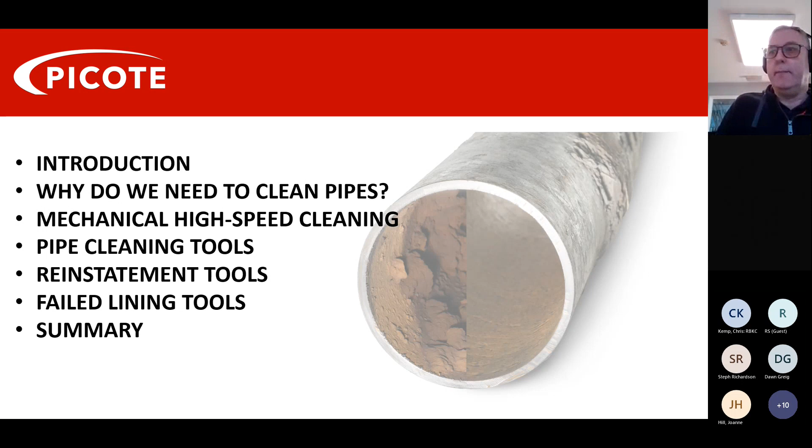20-25 minutes. So we're going to do a brief introduction of the business and the company. We're going to cover the question why. I'm going to explain the different cleaning methods, including our high-speed methods. We're going to look at the tools, and we've got various videos to show you as well, built into the slide pack. So, Picote Solutions.

Picote was formed back in the 1990s. It's a Finnish company, and at that stage they specialised in the rehabilitation of pipes in buildings. If you go back to those years, there was very little mechanical equipment, tools, etc. So as they developed the in-house lining systems, they had to develop a range of tools.

This carried on until 2012, where we had various competitors and companies asking about purchasing the machines and tools. So in 2012, we launched Picote Solutions. I work for Picote Solutions, and we sell the tools and equipment around the world through a range of resellers.

In 2018, we launched our e-learning Picote Institute. There's a slide at the end of this where you can get the address for that, and there's loads and loads of information on there.

In 2021, we launched our international consultancy part of the business, combining all our technical support, technical knowledge, and in-house rehabilitation experience that we've done for years in Finland. We're now showing people, teaching people, and showing it around the world. And this year, we launched what we call Picote Aqua, and we'll come on to Picote Aqua in the presentation.

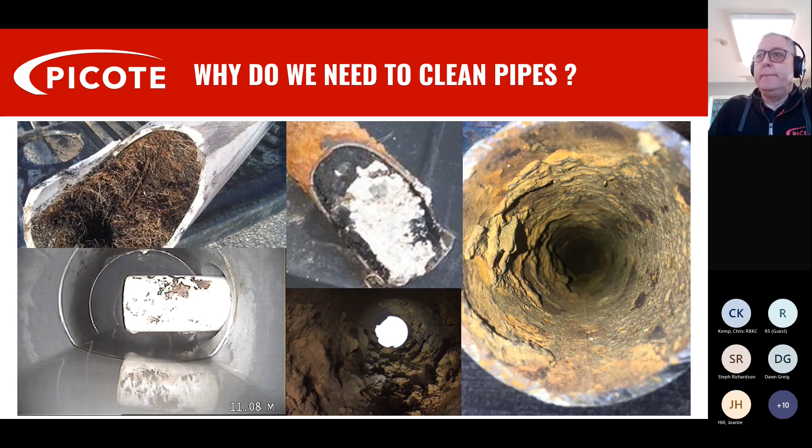The machines were initially developed by 2008. We have a range of machines, not just one machine - from the DN32 up to the DN300. So that's your 1.25 inch to 12-inch pipes.

The rotation speeds - normal traditional electromechanical machines rotate around about 200 RPM. Our machines, our slow speed is 500, and then depending on the model of the machine, they rotate up to 2,900 RPM. We have various shaft sizes - our smallest machine has an 8mm shaft, and our largest has an 18mm shaft.

That steel shaft is housed inside an outer casing. So the operator holds onto the outer casing and feeds the tool through the pipe, and the tools are connected onto the internal steel shaft. They have multi-purposes, multi-uses - they're great for cleaning, descaling, root cutting, unblocking pipes, removing fats oil and grease, cutting out failed liners, cutting out concrete, and reinstating lateral connections after a pipe's been lined.

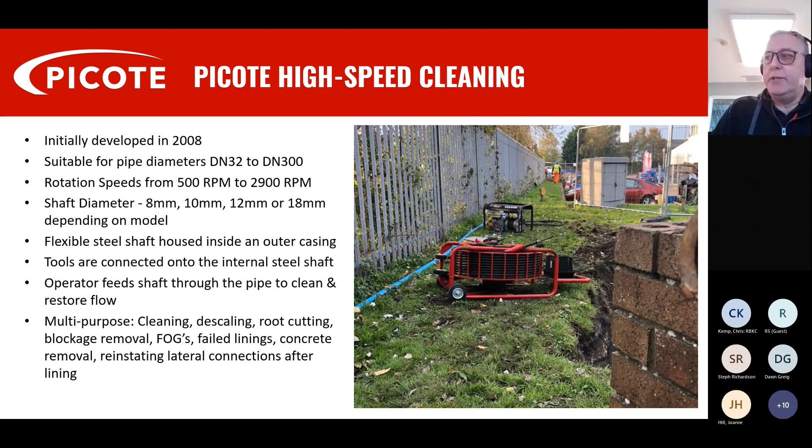The machines have a small footprint. You can see this one here - it's what we call our Super Midi, and it's being used to descale and clean a water main prior to rehabilitation. Like I said, we have a range of machines.

Benefits of what we've got here: the machines are very portable. They all have a built-in safety clutch that can either be mechanical or electronic. Very, very safe to use because there's no contact with rotating parts. The operator's just holding onto the outer casing. All our machines and tools are designed to go through 90-degree bends.

They are mechanical machines, so you don't need to use water. In some cases we might have a little bit of flow of water to take the debris or dust away, but you can use them dry. They can be used in vertical or horizontal pipes, and we have a small footprint and low carbon, which is great.

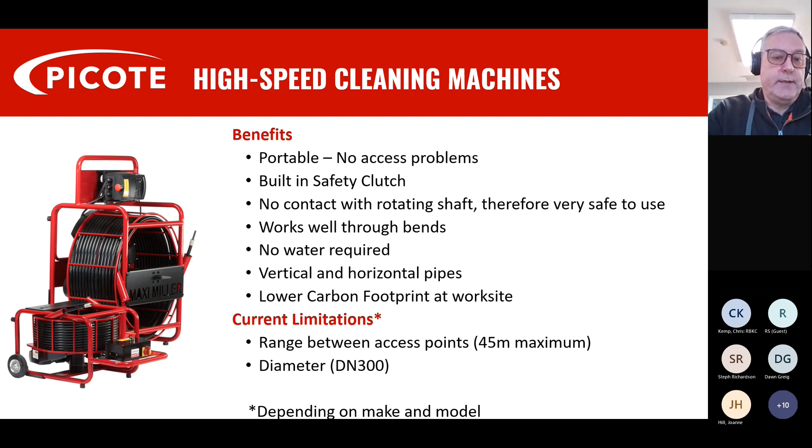Current limitations, and I'll come forward straight up with this at the beginning of the presentation, is that our limitations currently are the range. We can work from a single access point up to 45 meters, depending on the machine, and our top diameter is DN300.

So what we've got is machines. The 8mm machines, the mini cleaner, is suitable for 32 to 70mm pipework, with 16 meters working length on the drum, but we can add 10-meter extensions as well. The 8mm machines will go 32 to 70, and the mini miller will go from 50 up to 150. The 10mm machine, the midi cleaner, would do 50mm to 150.

And then we've got the super midis and the maxi on the 12mm shaft, and the big Power Plus.

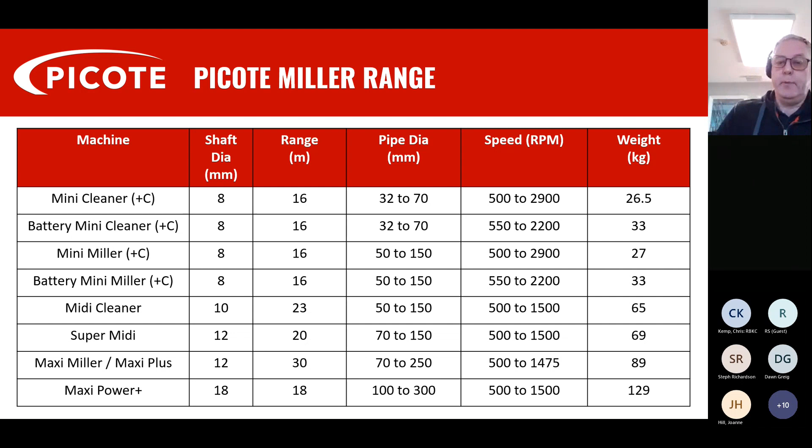When people are looking at purchasing a machine, it depends on the pipe diameter, or it depends what you want to use the machine for. So we have two tables. Here you can see that we've got the machines for cleaning, descaling, root cutting, lateral reinstatements, removing failed liners, and cutting out concrete. The numbers in the boxes relate to the largest diameter that machine can do.

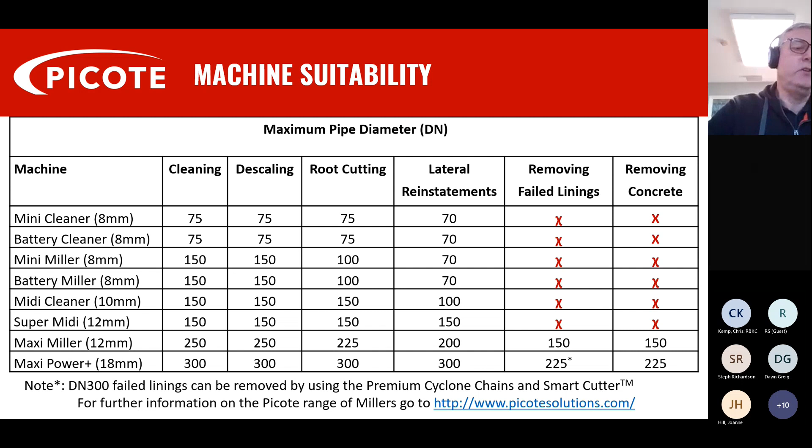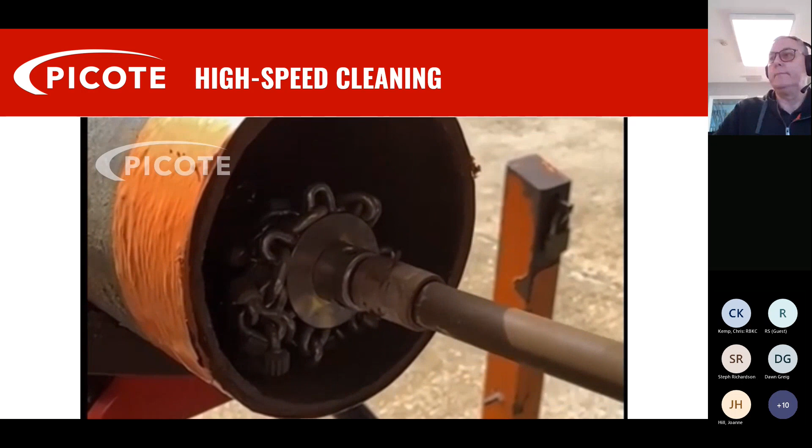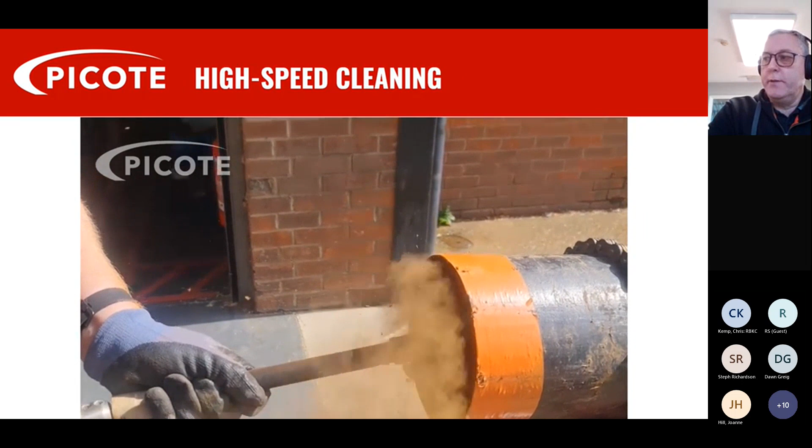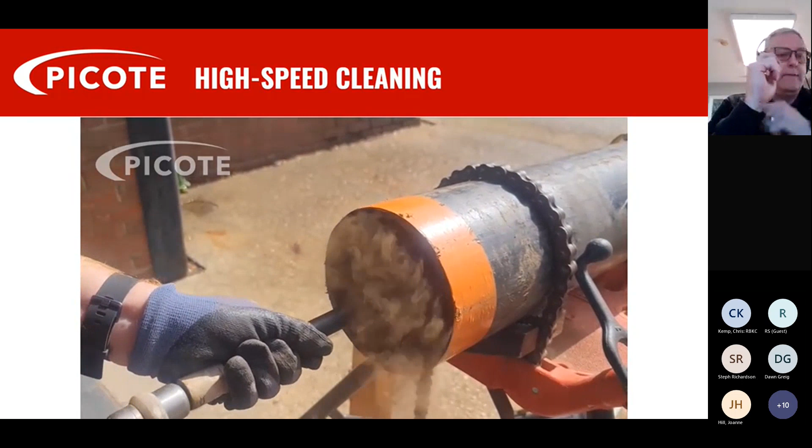As I said, when it starts up we get dust, and then we just feed the chain backwards and forwards through the pipe, and you can see here there's loads of dust and some small particles of heavier material. But the beauty about high-speed cleaning is that the chain just turns everything to dust, and it's very efficient as well.

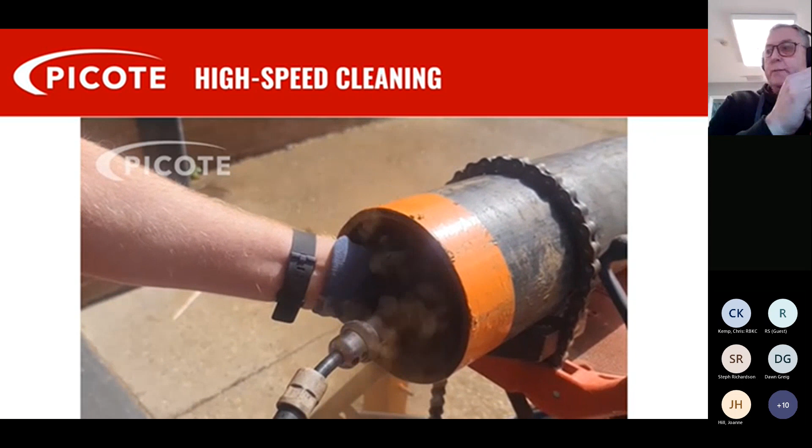So currently, existing pipe cleaning methods—there's existing technology out there, from pipe pigging, rack feed boring, drag scraping. Some of the newer systems use a combination of air and grit, where the air creates a vortex and you blow the grit through.

Clean systems: we've got ice pigging, and we've also got high pressure water jetting. These technologies are generally cumbersome, outdated, time consuming, and require large generators or compressors and winches to operate. Safety and worksite footprint are also a huge consideration, and that's one thing where, again, the high-speed machines have a very small footprint and are very safe to use.

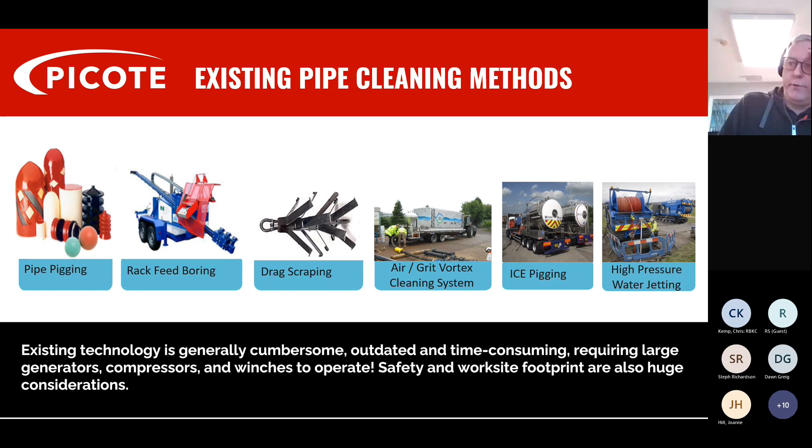So here's a pre-cleaning and post-cleaning photograph in cast iron.

The beauty about the machines is because we have the outer casing, you can actually fasten a CCTV camera behind the cleaning head and attach it to the outer casing. Then you can actually monitor what you're doing, monitoring the progress etc., which is also another big advantage.

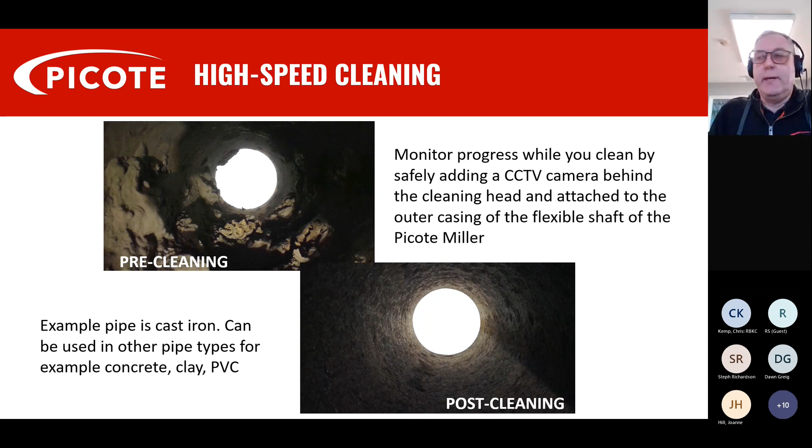We do a whole range of tools - I'm not going to go through all the tools. We have chains: what we call our PVC chains, which are safe to use in plastic pipes. We have Tiger, which have very hard wearing, long-lasting carbide teeth, and are very light chains. We have our standard, and then we have our premium chains, which are the ones we use to remove really hard substances like concrete. So those are the different types of chains that we have.

And then obviously we have what we call the original chains, which have two connection points. The operator sets them to the correct size by either stretching them or bringing the two connectors together slightly. They're adjusted manually. We also have what we call the 3D chain.

This has a spring and a forged head on it. So the faster the machine rotates, the larger that chain is.

It's great because you can do multiple changes in diameter with the same chain without having to keep manually adjusting it. We have our Tiger drill chains, which have a cutting drill head on the front. So where you've got a pipe that's 99% full of tuberculation, tree roots, or debris, the Tiger drill head cuts into it and makes space for the chains to work.

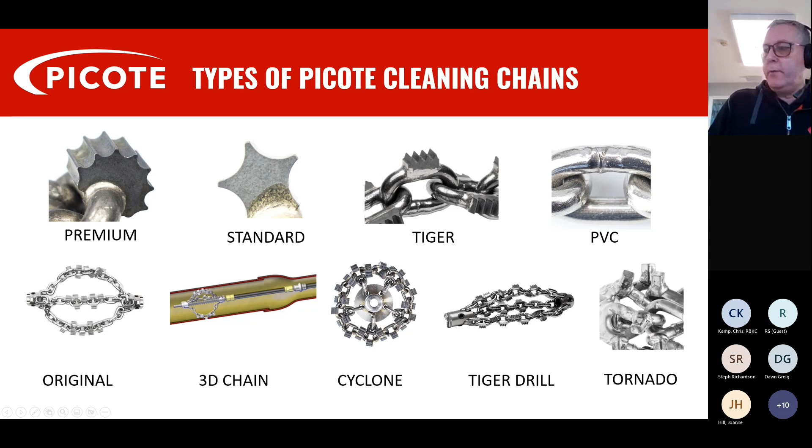And then for the really large diameters, we have what we call the tornado chains. So here's a fairly good example where we use high-speed cleaning. This is a section of pipe that was removed from a process plant. The client or contractor tried various cleaning methods, including ultra high pressure water jetting, without any success at all.

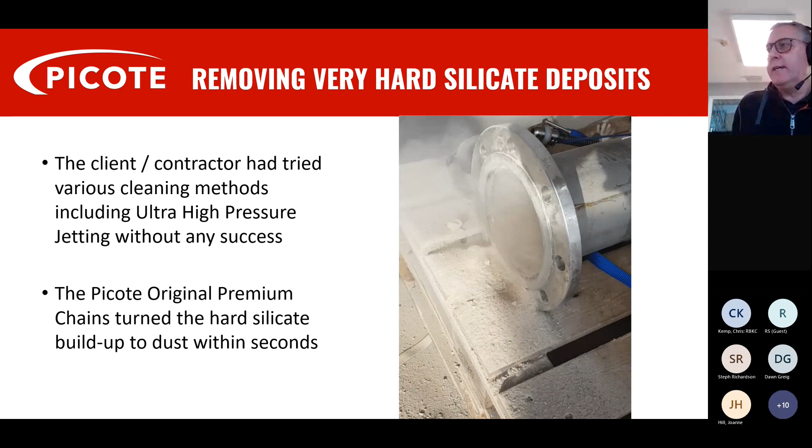They brought a section of the pipe down into Picote, and this is the video. We literally took one of our original premium chains, I think it was on a Super Midi - that's a 12mm machine. You can see here when the chain starts rotating, the material just turns to dust.

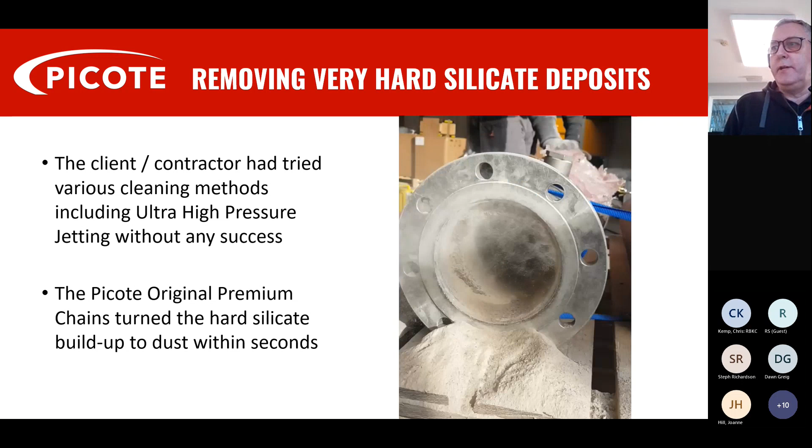And with the ultra high pressure, the jetters didn't even scratch the surface. So a good example of what you can do with high speed cleaning.

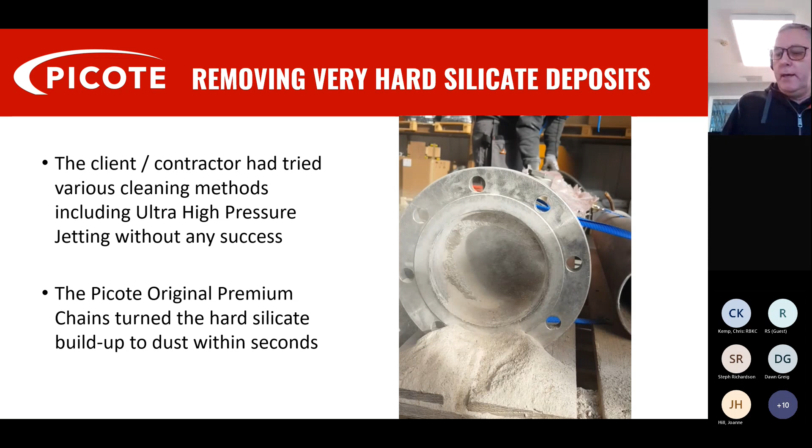There we have what people refer to as the Picote Smart Cutter. This is an award-winning tool that won an International Society of Trenchless Technology award back in 2012. It consists of a hub and grinding panels. It's a very versatile machine tool that we have.

You can use it for doing reinstatements, descaling metal pipes and cleaning metal pipes, removing hard deposits. So it goes in where we're going to either use the chains, or once we've used the chains, we want to smooth off the surface.

It's great for cutting out tree roots. We have companies using this who are steel fabrication companies making and welding steel pipe, and they use the smart cutter to grind back the internal weld.

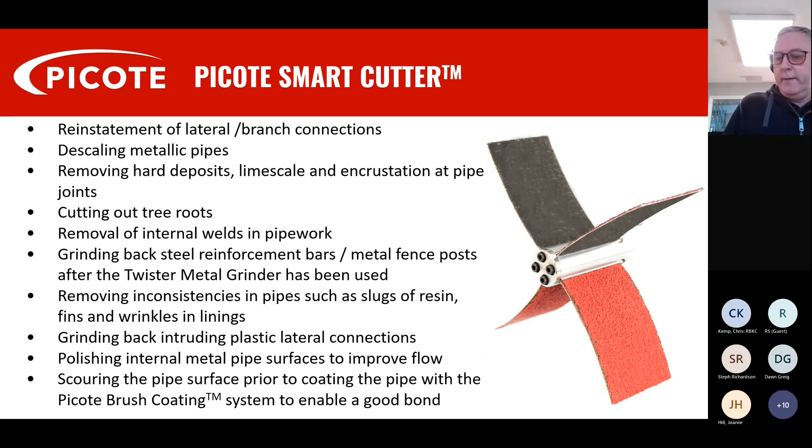We can use it to grind back steel reinforcement bars, metal fence posts. We can use it for grinding away inconsistencies in pipe work. It is a very, very versatile tool.

Here's an example where we've got a pipe that's been welded, and we've still got the internal bead running here. With the smart cutter, the operator is pushing it slowly backwards and forwards.

Here we're actually removing the internal bead on the steel pipe on the bend. We're not doing it on the straight section because that's easy - to demonstrate the tool, we've done it on the bend, and you can see the before and after.

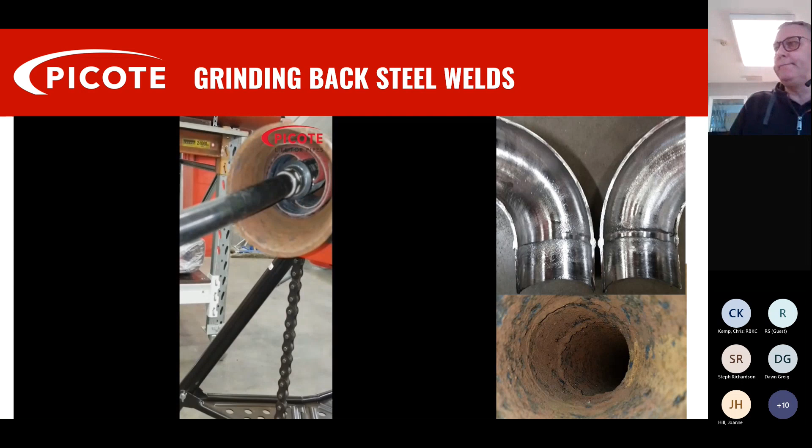We have what we call a Twister Metal Grinder. Here's an example - we use it generally where we have a steel bar, rebar, or something protruding partially or fully into a pipe.

It has a carbide grinding stone on the front. For this example, we just used a 10mm threaded bar. We've sped the video up - so we've cut through there, and then we go in with the smart cutter.

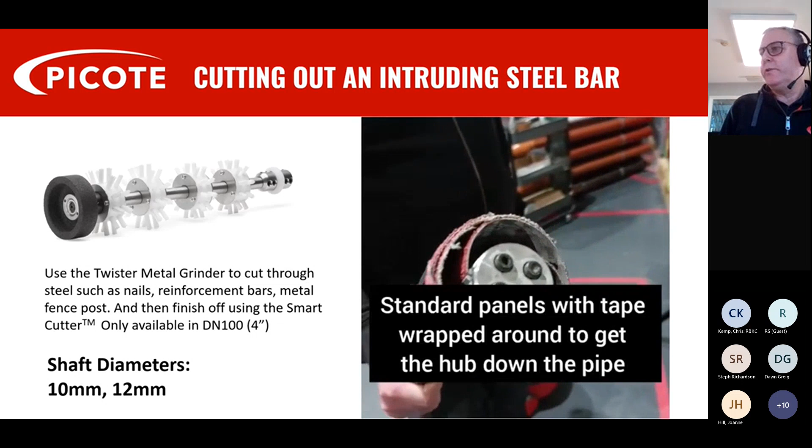To help us get the smart cutter in, we generally wrap the panels around and then hold it in place with some PVC tape. You can see here again the steel bar that was left at the 12 o'clock position slowly disappearing away with the grinding panels.

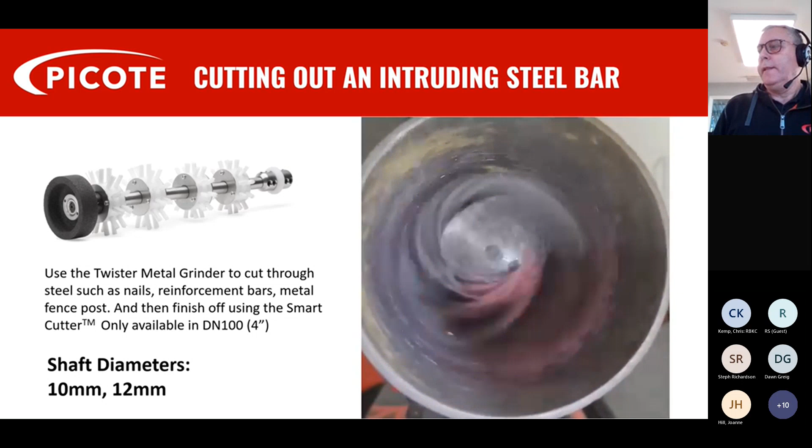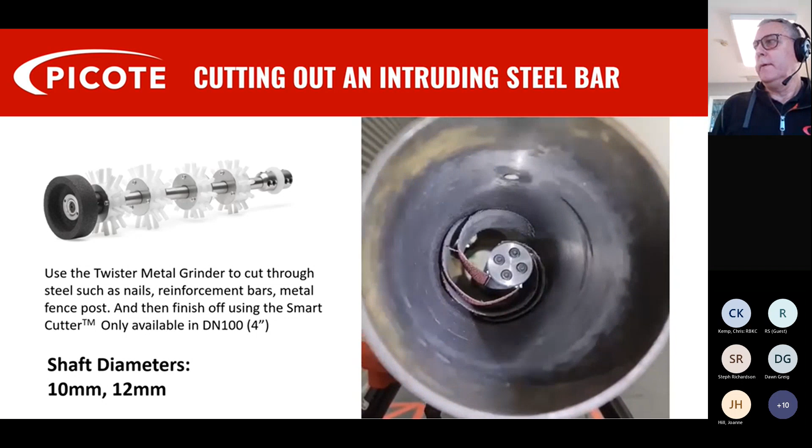I think total from start to finish this was 10 minutes. And there you see it's been flushed, ground flush right back. Yeah, whole task complete in less than 10 minutes.

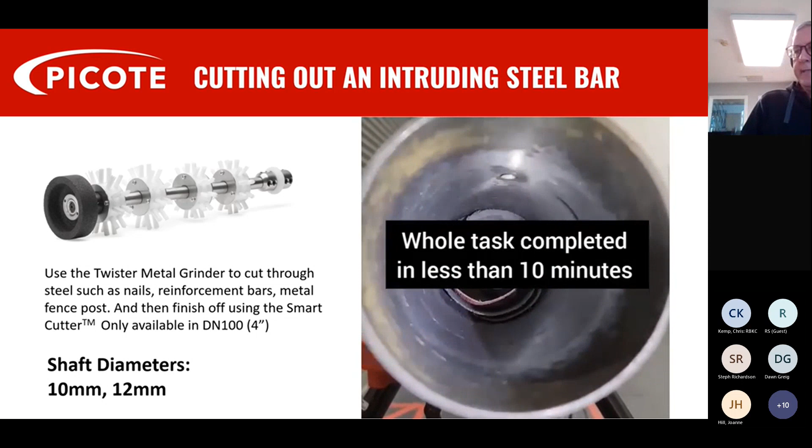metal pipes or pipes where we've lost some of the pipe wall, so there's a hole in the pipe. Now, if you've got a hole or a missing section of pipe, if you try most cleaning methods, you can't clean it and you can't inspect it.

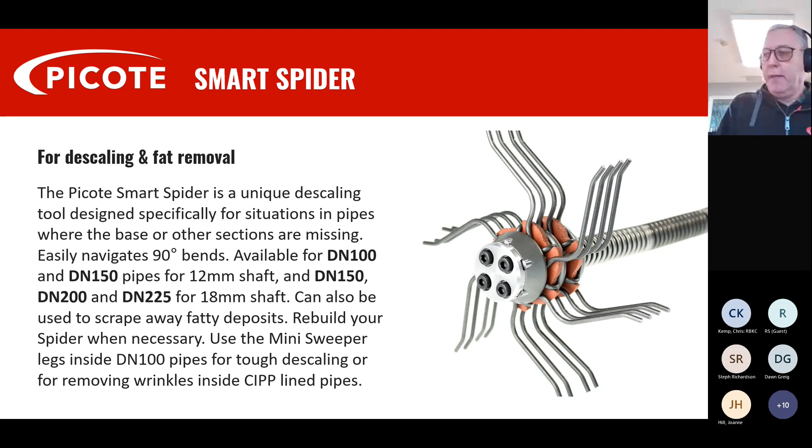The legs are spring loaded and oversized, so it will always stay central in the pipe. Here's a good example of the smart spider being used to clean this pipe, and once we've cleaned it, we need to inspect it, and then depending on the condition, we might want to put a liner in there.

Currently, with existing tools and cleaning methods, you wouldn't be able to clean that, and you wouldn't even get a CCTV camera through because it would drop out of the pipe. So here we go, and you can see the legs index in and out, and the dust coming off because we're cleaning it as we go through. You can see the tool is staying inside the pipe; it hasn't come out.

If you need to, you can also fasten a CCTV camera to the outer casing, which means you can camera, clean, and then repair that pipe. We've also found out that...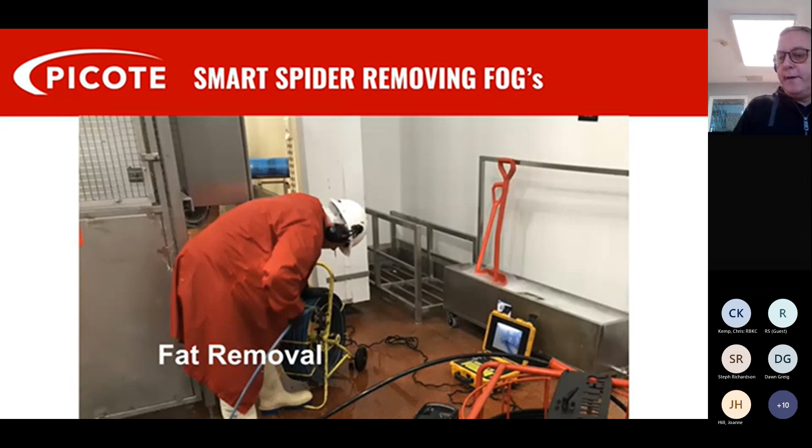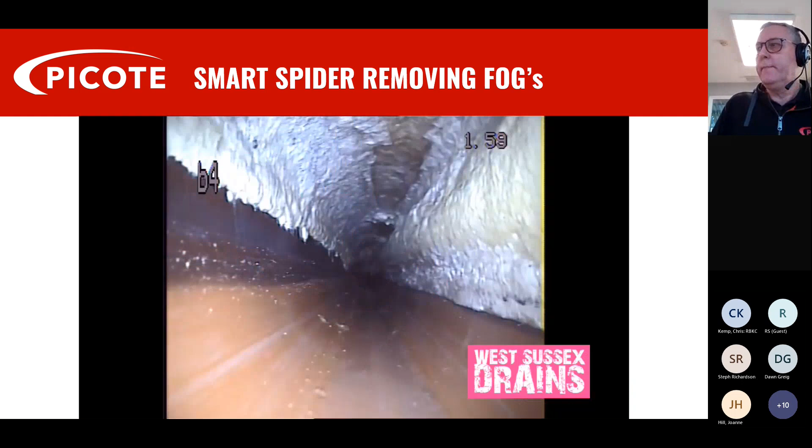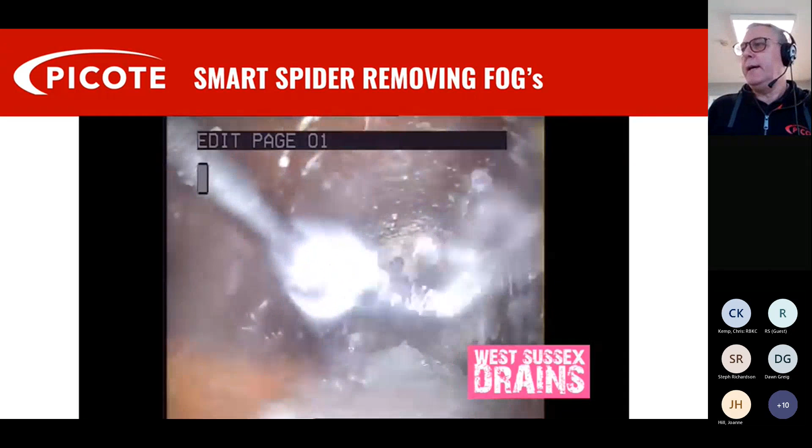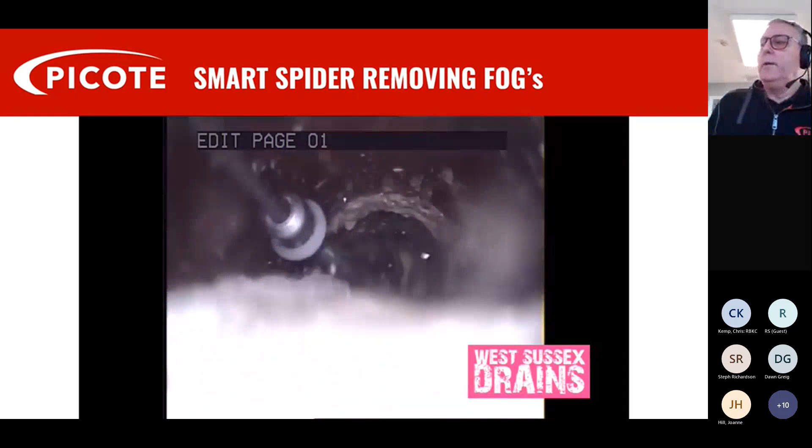The spider has also been used by quite a few contractors now for removing fat, oil, and grease. Here is a video supplied by West Sussex Drains, full of fat FOGs in there. You can see they've got the camera down, and as the spider rotates, it chips all the hard fat into little chunks that just get washed away with a bit of flowing water. So they're monitoring what they can do with the camera.

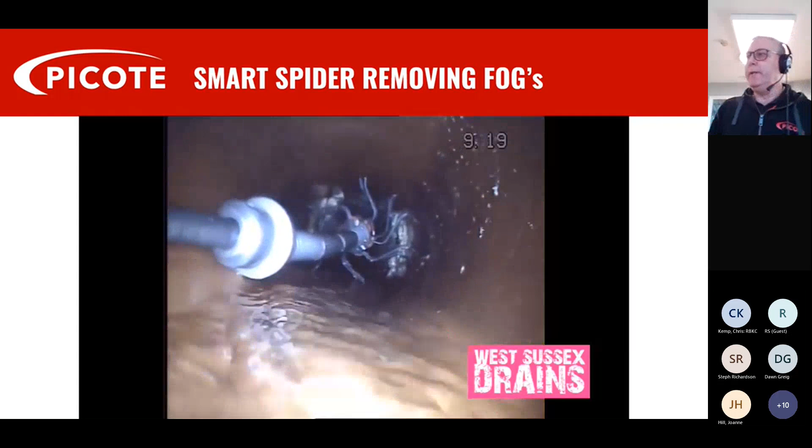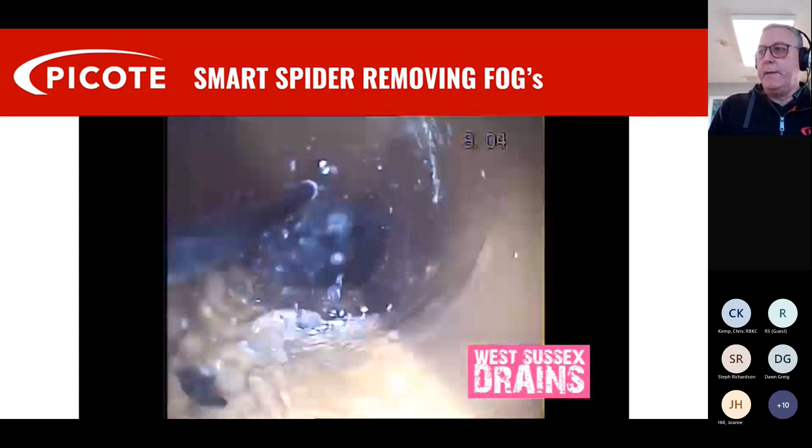So we've done one pass, put the camera down, and it's cleared 98% of the fat off the inside of the pipe. There's just a little bit more, so they're going back down again with the spider. You can see here this is the post-clean video. All of it has been removed.

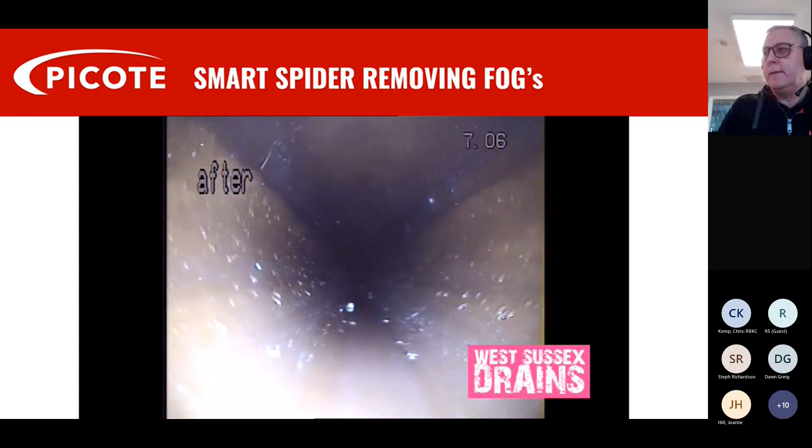So I mentioned earlier root cutting. The beauty about the Picotes and the tools we have is we can take a combination of front drill heads, grinding panels, and chains, and build up a tool specific for a certain project or job.

So that is the power of what we can do very quickly and very easily.

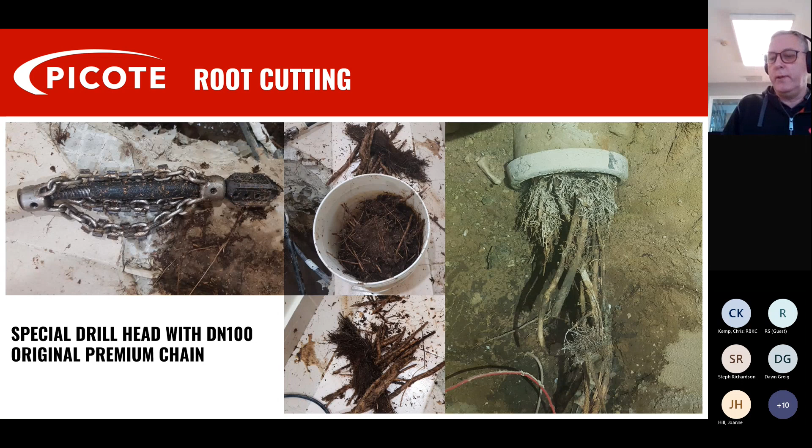For people doing any pipe rehabilitation, instead of using a very expensive robotic cutter, if you've lined over a lateral connection, we have what we call lateral twisters, which we use to come down the lateral, and they will cut through the lined-over junction.

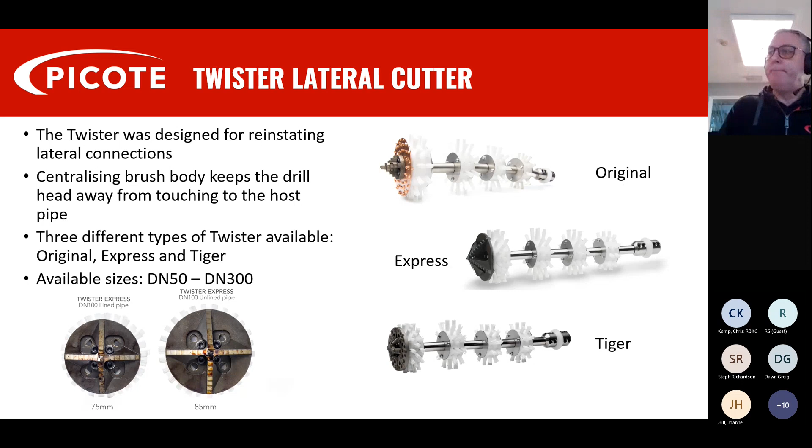We can use these tools here, but let me explain. So we've lined one pipe, cut it off, then gone down with the twister through the lateral to reinstate that pipe, and then we get flows. We finish off, grinding it right back to the inside of the pipe wall, using the Picote Smart Cutter.

We have tools for removing failed liners. Nobody actually thinks they have any failed liners, but they always take a lot of interest when we actually produce the liner removal tool.

We've also got what we call twister concrete remover tools for removing hard concrete. They are successful on 20 megapascal concrete, and we have used it to mill through 40 MPa concrete as well.

So those are the two ones: the liner removal tool for failed liners, and the concrete remover tool. We've now also got what we call the Tiger Twister liner and concrete remover tool, which works in both concrete and failed liner. The failed liner and concrete removers have a 3mm front metal panel, while the Tiger Twister has harder wearing carbide teeth and a 6mm panel.

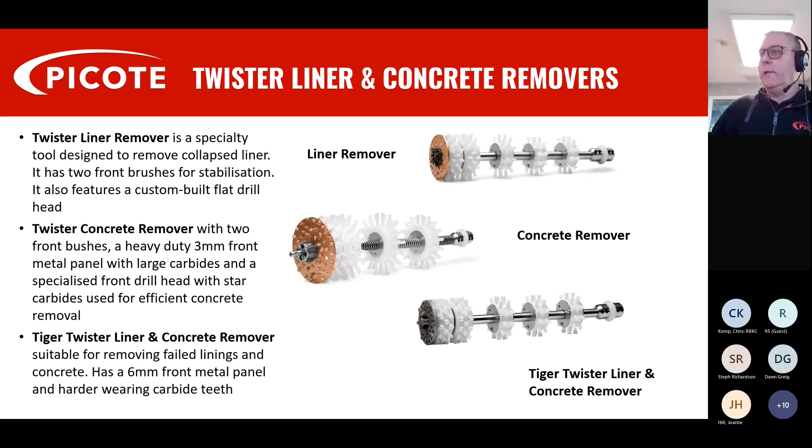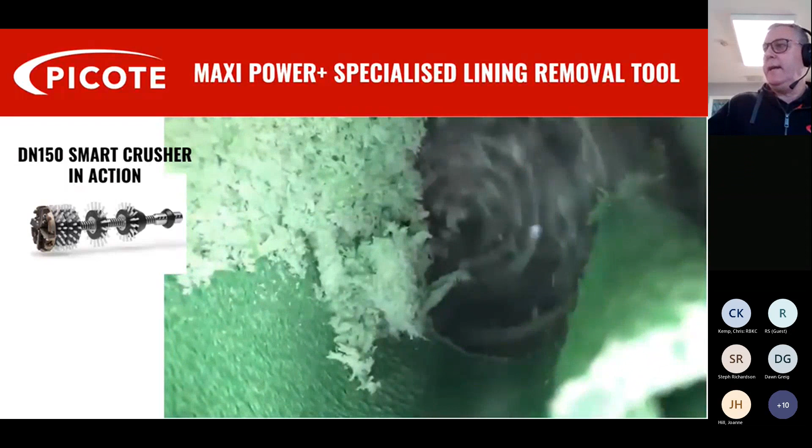All these tools also have cutters and teeth on the rear of the metal disc, so if it does get stuck, as you come back out of the pipe, it will cut itself free. Here's a little video cutting out a section of failed liner. You can see the milling head, the crusher we've got, on a 150mm/6-inch pipe, just shredding that failed liner into very small particles.

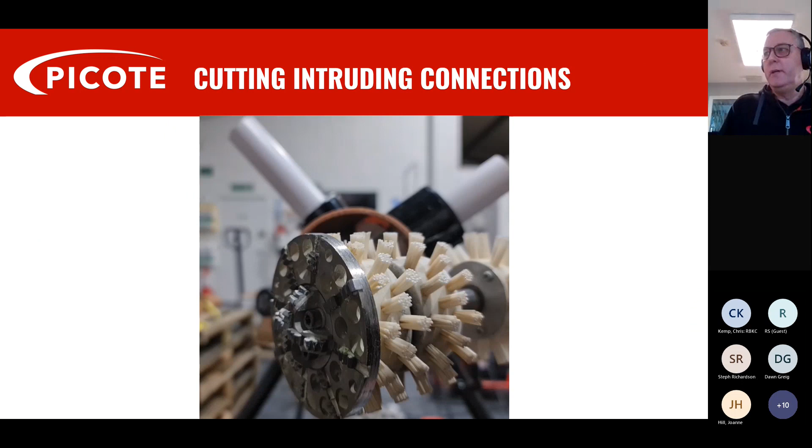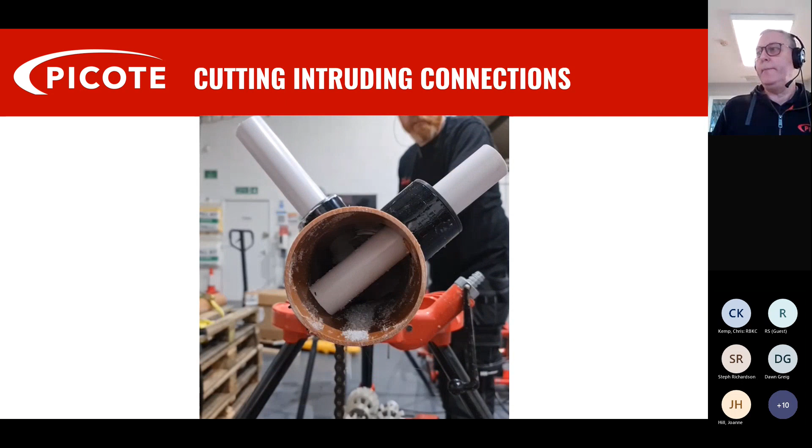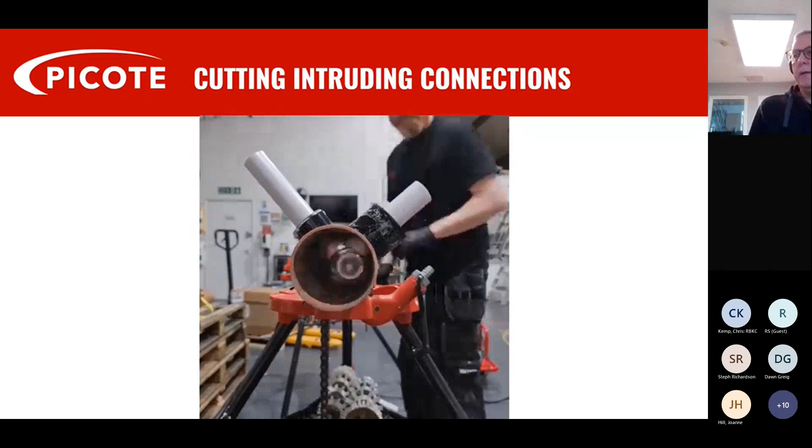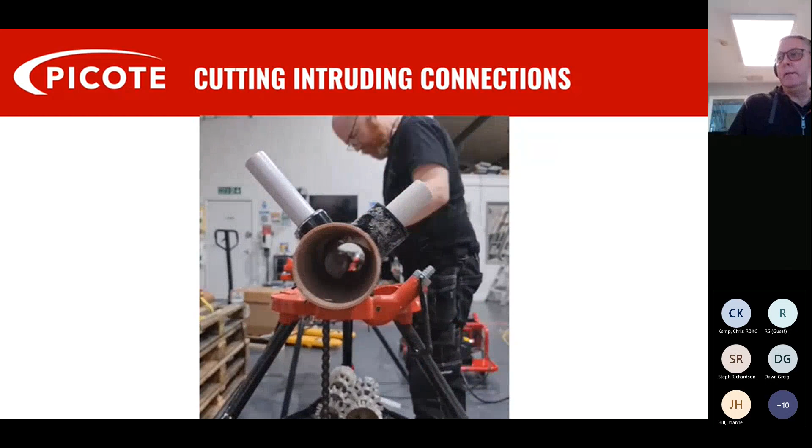The other twisters we've shown you can also be used for removing intruding connections. Here we've got a 1.5 inch intruding plastic pipe intruding into a 100mm host pipe, and Dan is coming through with one of our Tiger tools, slowly cutting through. There we go, that's opened it up. Then he'll go back down with a very versatile smart cutter, slowly grinding back, and that intruding bit of plastic pipe left will be ground flush. You can see how it's nearly flush now with the internal pipe.

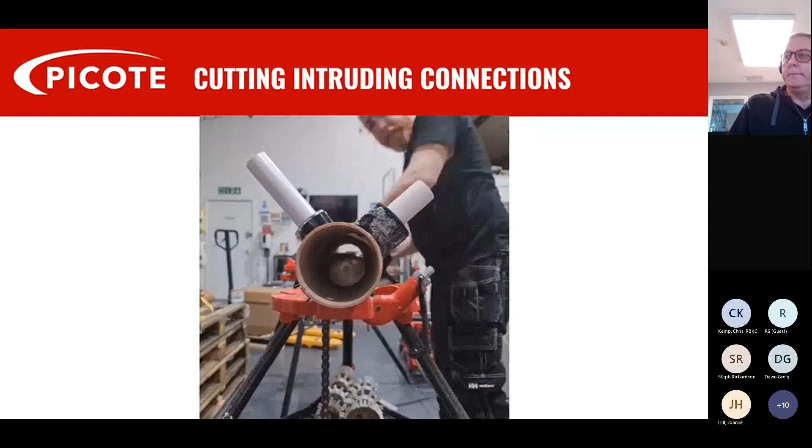There we are, done. I did mention earlier that in 2022 we launched our Aqua Range.

Our Aqua Range is aimed purely at the cleaning of water pipes. The difference compared to our normal millers is, firstly, it has a nice blue frame, not a red or black one. We've applied a nanotechnology to the outer casing, and if need be the tools, so that stops any buildup of bacterial material on the outer casing. We have a lubricant between the steel shaft and the outer casing, and for the Aqua machines that is a food grade oil.

It's a new range of machines aimed at the cleaning of water mains prior to rehabilitation. We're not selling any rehabilitation ourselves, we're just having a very effective and very quick way of cleaning and descaling the water pipes prior to that.

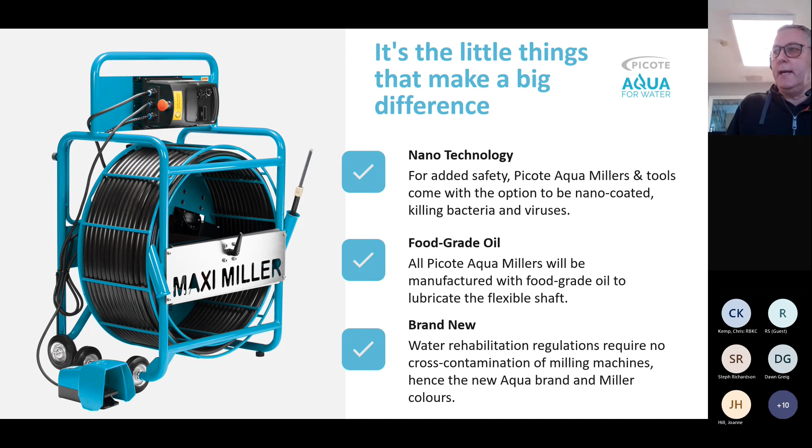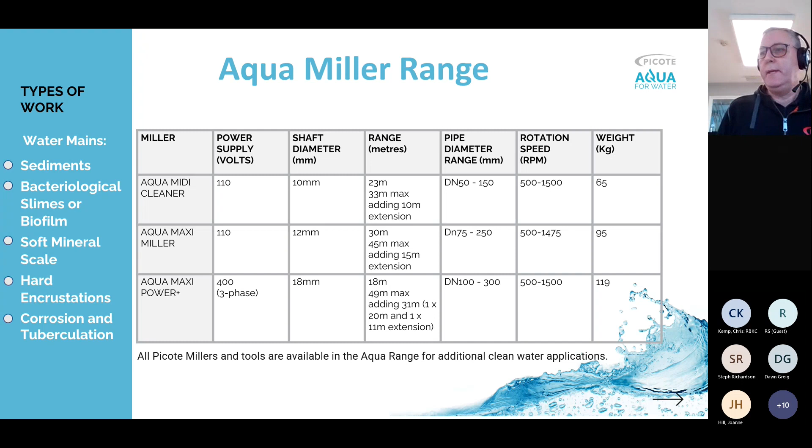The Aqua Range currently has three machines: the Aqua Midi, the Aqua Maxi, and the Power Plus, with 10, 12, and 18 mil shafts. Minimum range is 23 meters. Maximum range is 33 meters with the Midi cleaner, the 10 mil shaft, and we can do maximum 45 meters from an access point with the 12 mil, and 49 meters with the 18 mil machine. Like I said at the beginning, our limitation has been the length we can operate at, and 49 meters is the maximum from a single access point.

Also with the Aqua Range, we've worked with Schwalm in Europe for many years, and in North America too, and we've developed the Picote tools to go onto the Schwalm Talpa series of robots. They have a standard operating length of 200 meters, which is as far as the crawler can drive itself because of the weight of the umbilical cable and everything else behind it. But we can go further because we can put an attachment on the front, which means we can pull and winch the robot further. In the States they've gone up to 300 meters using a winch.

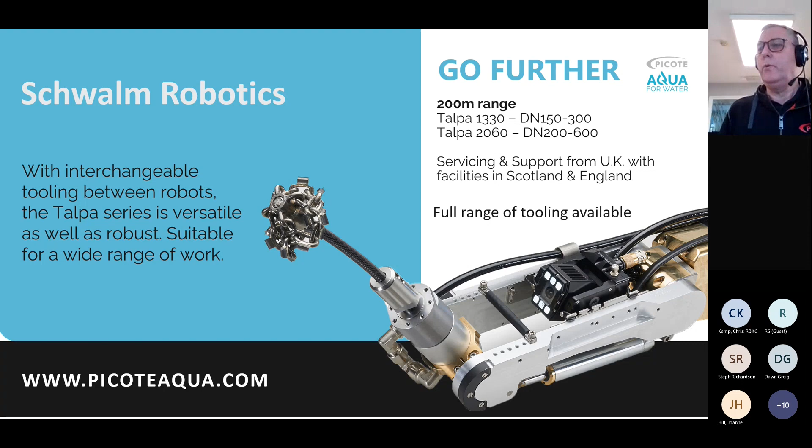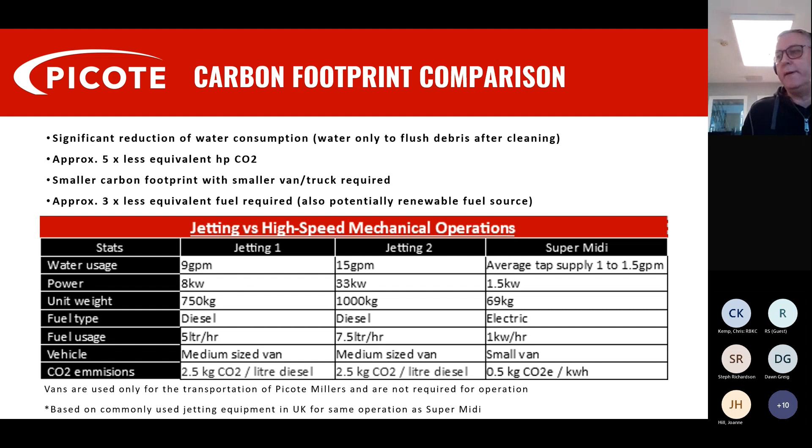Moving on, carbon footprint. Here's a project we've worked on for a while, comparing the CO2 emissions of our Super Midi, which has a 110 volt electric motor, against equivalent jetting machines. You can see our CO2 emissions are well below those of a jetter machine. The beauty also is the size of our equipment means it will fit in a small van, not a medium to large sized 3.5 ton van.

90% of Picote components that we use on our machines can be recycled. All our aluminium and electrical cables and everything can be, like I said, 90% of it is recyclable.

We mentioned e-learning resources. We have what we call the Picote Institute. It's free to subscribe, all we need you to do is register with your email address. We don't send anything out to people, so we won't hassle anyone. It's a really good source of information. All our documentation's on there. We have lots of operation manuals, top hints, how to use the machines, all the tool guides, all the quick guides. Absolutely everything is on there, and we continuously keep adding to that.

Every few weeks there'll be something new put on there. People can upload their own videos as well to demonstrate what they've been doing, and we have what we call training courses, the 101 courses.